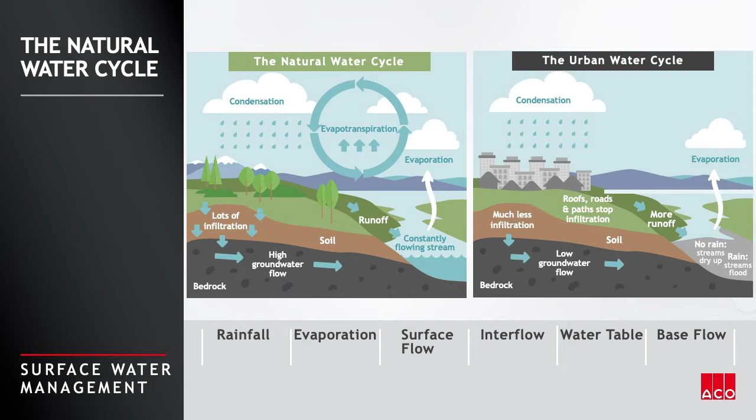So what generally happens is we become more urban and we create our urban environments. We start concreting over everything. We make them impermeable. So in making things impermeable, there's less infiltration into the ground, and therefore less flow going to our river basins, and over a period of time they become dried out, which is what happens in villages across the country. And quite often, because of that high level of impermeability, as the water hits the ground, there's an acceleration of that water as it cascades off the surface.

So if it's not being able to infiltrate into the ground or evaporate straight off the surface or evapotranspirate through plants when they soak them through their root systems, then it's literally going to just cascade straight off the surface, and eventually that creates a problem downstream.

So if it's impermeable, fast-flowing water, no restriction to it as it comes from a site, then whoever's downstream of that area, and we've seen this up in Yorkshire at the moment in terms of the flooding that's happening up there, the low-lying land is the area that gets hit the worst, because all of the flow of water just cascades straight towards that point, and then you get an elevated level of water, i.e. there's flooding in that area.

We'll discuss that in a lot more detail as I go throughout the presentation, but this is just a basic scope of it as you go from the natural system all the way through to a heavily urbanized industrial environment, and you can see that the runoff increases, you get a decrease in infiltration, and quite often or not, you get a decrease in the evapotranspiration through plants, which is what you see there.

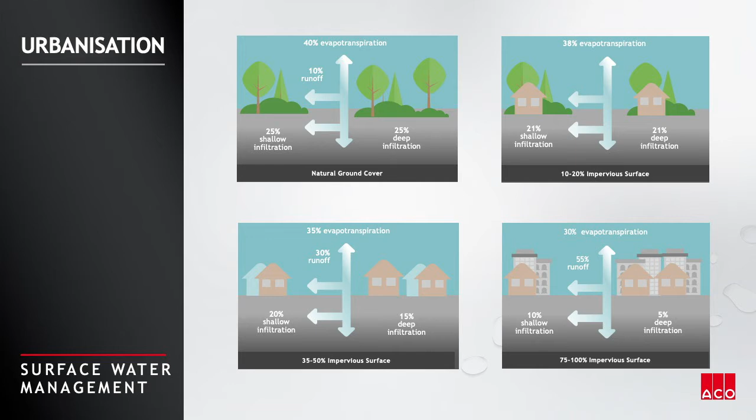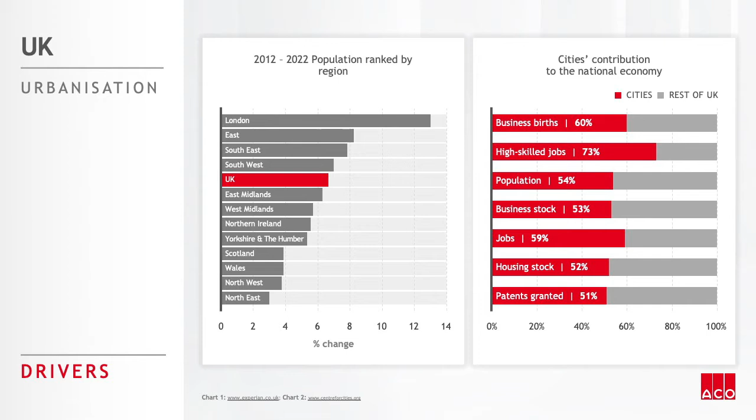So one of these problems of urbanization is population growth. So what you see here is a graphic where you're going to see over a 5% increase in population up until 2022 for 8 of the 13 regions of the UK, and none of them are seeing negative. So what that's going to mean is that more people are flooding to urban areas, and therefore it's going to cause more housing, more impermeable surfaces, more often than not anyway, and they're just trying to find that balance.

The other one is about economics and showing why people are moving to urban areas, and that's just because simply there's more highly skilled jobs and higher pay in those areas. And this is when we're talking about urbanization and we're talking about land use. This is the Coordination of Information on the Environment, or CORINE for short.

And this is where they've used data from photography and taken planes over a landscape over the whole of the UK, and they've taken imagery and analysed the actual land use in its current state. And they originally took it in 2006 and they did it again in 2012. And what they found is that 2,250 square kilometres had changed in that 6-year period. Now, that doesn't mean it's all made into an impermeable surface. That could be from forestry to commercial, from commercial to housing, it's those small changes that happen.

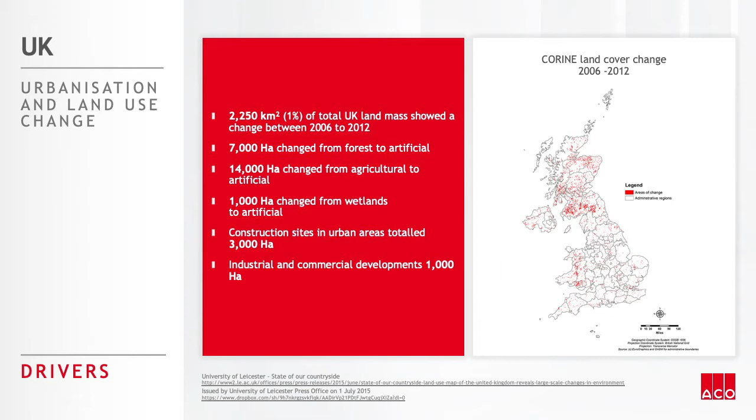But if we said that in a 6-year period, 1% change, and if it is 2,250 square kilometres, if 10 millimetres of rainfall landed on that area and it was impermeable, that'd be enough drinking water for 2.5 days for 60 million people. So when we talk about our sewer systems and how it all connects together, and the fact that most of our stuff goes into a combined sewer network or a foul sewer network, and all that has to go to a water treatment plant, and if the water treatment plant can't cope with it, then eventually it enters our natural system.

So the idea is that we use more of it on site, and that will be a characteristic of this presentation. And those red dots illustrate an area of more than 1 square kilometre that's changed in any given period over that 6 years.

So going on to the road network, well, I don't know how many people enjoyed traffic on the way here today. I didn't, I took the train. But the fact is that we are seeing an increase in road users. There's over 33.6 million licenses held in the UK. So that's the number of people that can drive, and we've got a population of 70 million people, so just less than half or something of that nature of people that can actually drive in the UK, which is crazy.

There's 37.8 million vehicles, so obviously people drive to work and then they drive another vehicle while they're at work, hence that's why there's more. And of that mix, I think it's 80% of those are cars and 11.7% are light goods vehicles, and then it drops down from that, and the rest make up basically motorbikes, heavy goods vehicles and things of that nature. Of that split, 59% is petrol and 40% is diesel, and the other 1% is gas, electric, those kinds of things.

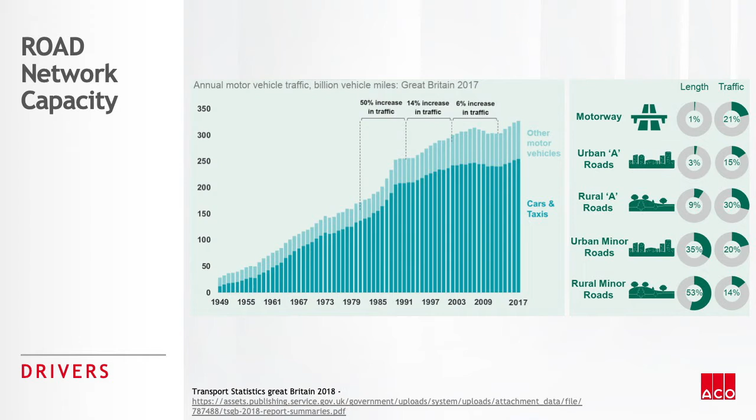So the graphic you see here is the number of miles that have been travelled in the UK, and there were 327 billion miles travelled in the UK in 2017. So that's billion. So it's quite a considerable number of transport miles on our road network. So you can see how it's under capacity, or it is getting to a critical mass of capacity. So that was an increase of 1.3% on the year of 2016.

So of this, I'm focused on van journeys and car journeys. Van journeys increased by 3% and car journeys increased only by 1%. Public transport decreased by 3% in that time. And I know this is all about the life of the raindrop, but as we're adding more and more cars to our network, then obviously that's going to add more pollution unless we focus on having electric vehicles or hydrogen-powered vehicles, or if we're having more public transport. So that's the reason why I'm focusing on that.

And particularly when we talk about congestion as well, as more cars are added we see our journey time is elongated, so there was an increase of 9 seconds for major roads, and that's only a 1.1% increase, but still. And then the journey time increased by 46.9 seconds for our urban roads. So that's for an A class, and that is adding on.

So say if you had a road which was completely free of traffic and then compared it to a journey time when you actually had traffic, then that's the amount of journey seconds that have been added. So if the motorway is completely clear, then it would be 9 seconds less than the journey you took on the motorway as you made your way up here. Does that make sense? Hopefully. And then on the urban roads, it was 46.9 seconds.

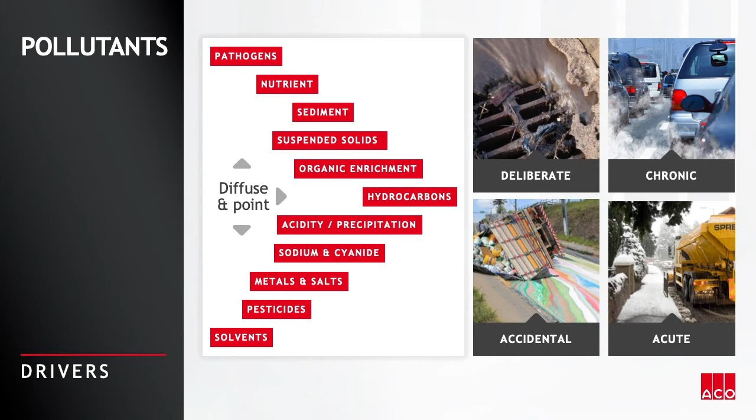So the road network produces more. We've seen a 65% increase in the amount of pollution that's produced by light goods vehicles, and that's because diesel was massively promoted under the Labour government, and until recently they found that obviously that's massively poisonous with the nitrous oxide that is produced out of the exhaust pipes. But we have seen a decrease in the car outputs in terms of the level of pollution that's produced there.

So this is just a side note, and this is the health implications of pollution in the UK. So the pollution directly contributed to a cost of 1.69 billion to the NHS and social care system between 2017 and 2025, so that's predicted. And it cost our economy 2.7 billion in terms of the overall cost of dealing with problems, of people taking days off and things of that nature.

So it is a massive contributing factor to our everyday lives and also our economy in terms of the level of pollution. And recently there have been articles coming out in The Guardian of how this is going to affect our young people's health in the future as well, as we have more climate change and things of that nature.

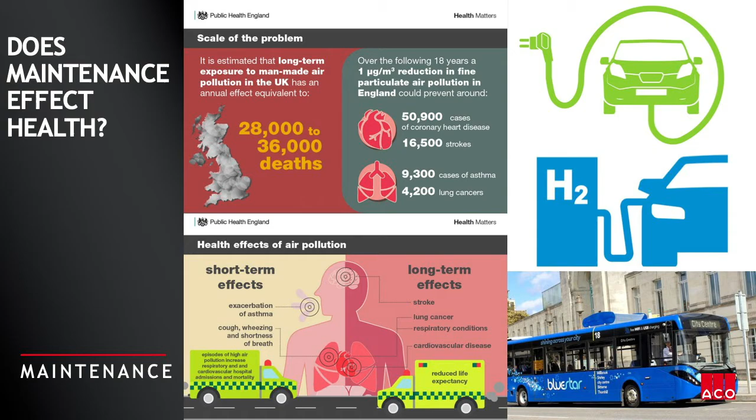The image in the bottom corner here is actually a pilot scheme. It's happening in Southampton. I don't know if many of you have seen it, but they've started adapting the vehicles so they've got a filter on the roof to reduce and remove the levels of air pollution in the environment. So that extracts it, which is ironic considering it's a diesel vehicle.

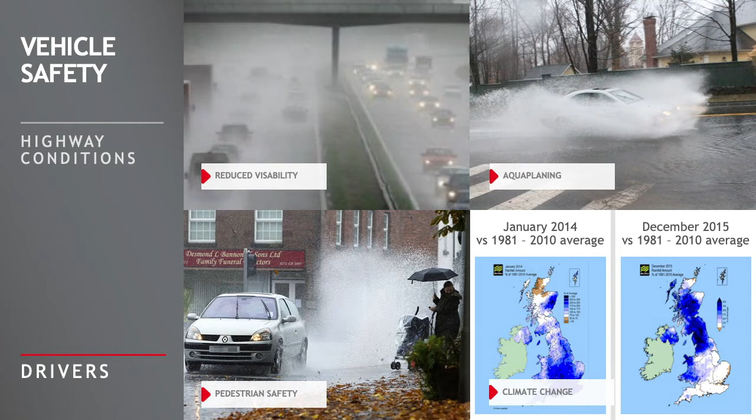So here's a bit about the danger. So as it falls, it lands on our road network, it creates a danger. So what you see here on the motorway is reduced visibility, so that's people you can see and people that see you, so therefore it creates a bit of a danger. It also affects your stopping distance and thinking time.

Aquaplaning and flooding create a problem for vehicle performance and also vehicle control, so that creates a danger. You've got pedestrian safety. It is actually illegal to splash somebody if you did it on purpose. I don't know how they would actually prosecute you, because you could say it's an accident, you didn't see it, but obviously it is a danger.

So making sure you design appropriate drainage and also maintenance schemes into your products will make sure that people aren't splashed on the highway. It also presents another danger when you do have flooding for pedestrians, because they might make their way into the highway to avoid that flooded area, and therefore they put themselves in danger. So all these have a problem.

Black ice also comes into that, and snow comes into that in terms of the dangers they cause, especially black ice when you can't see it, and of course you could skid and come out of control in your vehicle. And finally, the bottom image down there is climate change. So all of these different things are exacerbated by climate change as storms get more aggressive over time.

So it is going to be a massive problem, and it is going to have an effect on our environment, including the heating effect as well. So that's going to have a massive effect on our road network and our maintenance requirements and what effect it has on the materials that we use in those situations.

So here we're just talking briefly about a proprietary product treatment train. I'm going to talk about SuDS, and some of the SuDS are listed down below. So this is Collect, Clean, Hold, Release, which I'm going to go into a bit more detail in a moment. So what you can see are different avenues of actually controlling the water. So basically we have to collect it as it lands. Then if it isn't polluted, we might be able to just put that straight into a natural system.

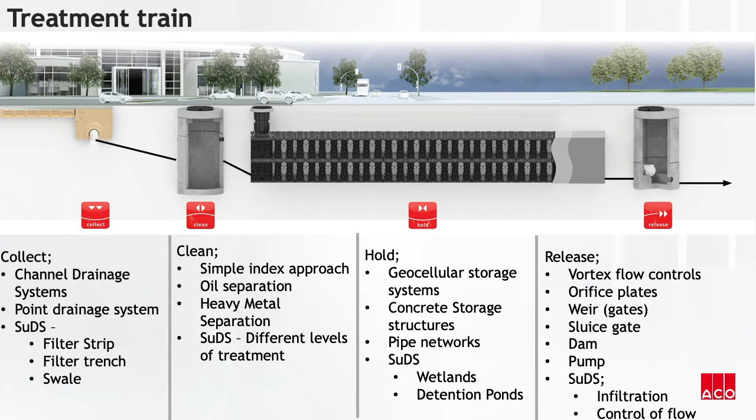So many different methods. We're showing geocellular storage systems on the slide there, but we will go into a bit about SuDS as well. And then finally, we can release it into the natural environment or into the combined sewer. So when I said about connecting to the sewer network, we might want to restrict the flow to make sure they can clean the water and make sure they're not using as much energy, or it doesn't cause issues downstream in terms of flooding. So we're going to go through them one by one and try and stick as much as we can to the highway situation.

So first of all, just talking about collect in terms of how you do it. So in the slide before, you may have seen that there's loads of different methods of doing that. So it could be a filter drain at the side of a road. It could be a gully system. If you live in Birmingham, you will actually recognize this project or scheme.

So this is the central reservation, and what happened there is that one of the gratings was left up. It was about 25 years ago, as it says there. But a grating was left up and it caused a motor vehicle accident.

So from this point, what actually happened is that on any highway scheme in the UK now, you have to use something called a monolithic type system. And that means it's just a one-piece unit, so you don't endanger people's lives. So in this scheme, it got changed over to a monolithic type product, and therefore it made it safe for any road user.

So that's what's actually happening. What I was trying to highlight on the slide is that no matter where it is, you have to actually collect the water. So you can see this is quite an industrialized area. There's no green infrastructure on either side of the road, so it's outletting straight into the middle, and it's actually conveying the water away. So channels are a good way of affording that.

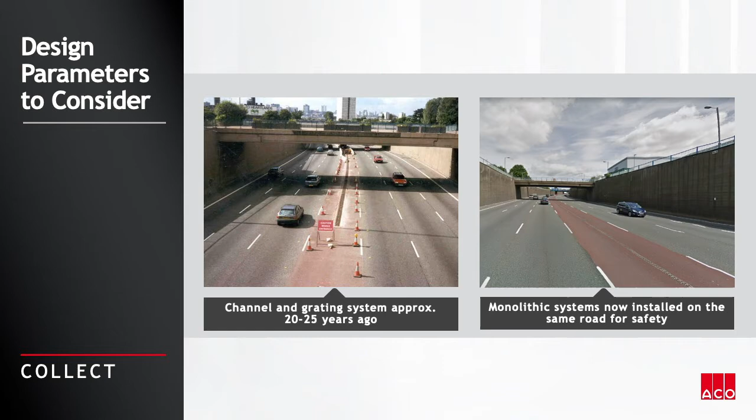Gullies and other items or proprietary products can do the same in terms of catching water. So that is it when you talk about monolithic type things and making sure that you collect it. They all do the same thing. They all catch water. It's just about considering what loading it has to be under and what design criteria you have to follow as well.

So what I was meant to highlight on there is that when you're carrying out a design in terms of how much water is caught on the ground, you have to design it, in the highway situation, to a 1 in 5 year storm. Now, some schemes or highways authorities or indeed local authorities will stipulate you have to use a higher storm. It's entirely down to them.

But in terms of national guidance, which is the Design Manual for Roads and Bridges, they give you a number which is 1 in 5 years, with a caveat that it has to take account of 20% climate change. So just make sure you design that into your schemes. And in a highway, that has to reach a minimum of D400 loading as well, in order for it to sit in the highway.

Unfortunately, I can't go into too much detail. I've got 20 minutes, but there are categories of loading that you have to adhere to for any system you put into a highway situation. So whether it be a gully, it'll have to be D400 loading, or a channel will have to be D400 loading, okay? And that's talking about monolithic systems.

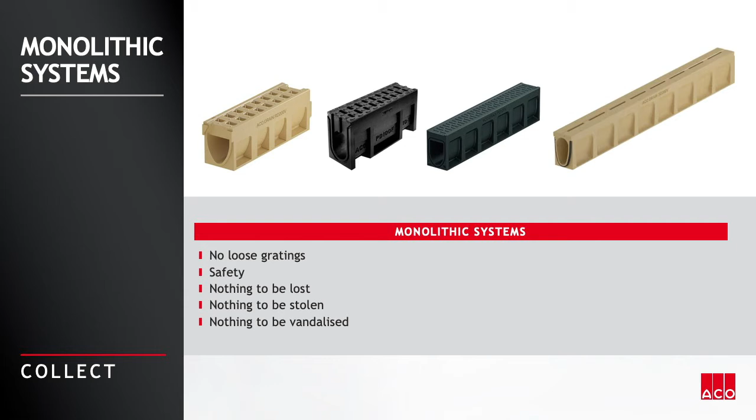The one thing to highlight is the opening at the top. Each one will be different depending on the situation you face, and depends on what you perceive to be the potential level of debris that might be going in there, or how fast you want the water to actually enter the system, so you know these are bigger than the other ones.

And you'll see these in quite a large array of the environment, a combined kerb drainage type system. These are a good conveyance tool, allowing the water to cascade into the channel at the side of the road in order to convey it away. The reason I'm highlighting this is that in order to stop aquaplaning, ponding, localized flooding, you want to create a long conveyance path, and that long conveyance path allows the water to discharge a lot quicker.

So what you see here is the connectivity up to different SUDS environments. The reason why that's highlighted is that what epitomizes SUDS is making sure you keep things as high up on the site as possible and use it at the source. Now, one way of saving space and keeping things high up on the surface is if you have a high outlet into a green piece of infrastructure.

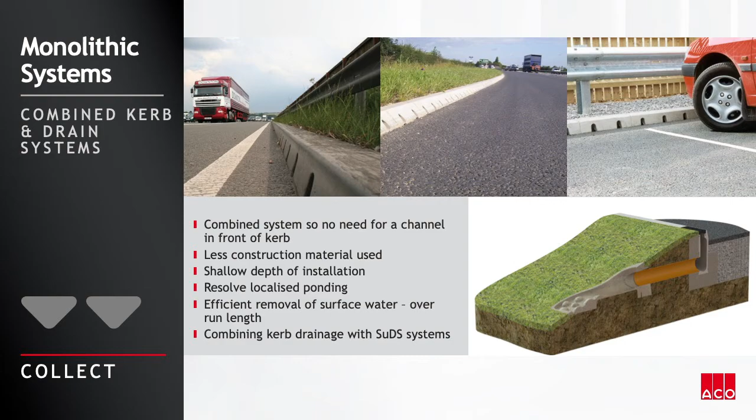Car parking spaces, I mean, we're talking about a highway here, but car parking spaces are worth £2,500 a week to a supermarket. So in terms of context, if you can shrink in the sides of any green infrastructure, which needs a 1 in 6 crossfall for safety so you can crawl out of it, it's beneficial to try and keep things high up on the site.

So imagine if we replace that and we have a pipe that has to be buried 1.2 meters to the crown, therefore your swale goes from being 600 millimeters down to 1.6 meters, which is quite a considerable distance. But what we're talking about here is the guidance for oil separators and the SUDS guidance in terms of whatever we want to design as SUDS.

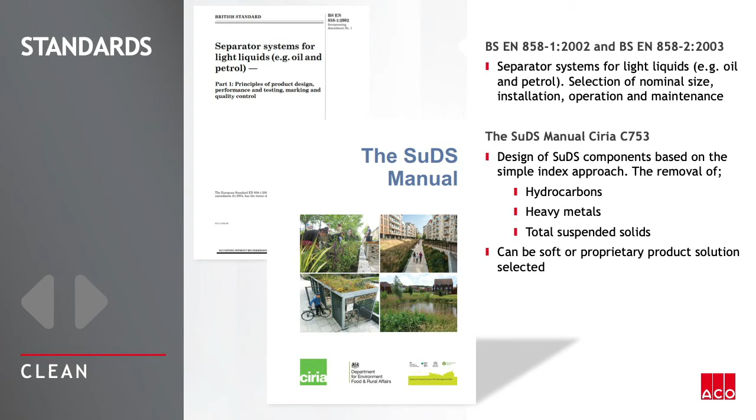So first of all, proprietary products in terms of oil separators are devices that remove oil, and I'll explain those in a minute, but that's the guidance you follow. And then the SUDS manual has something called the mitigation indices. Is there anybody in this room that has designed to the mitigation indices or come across them? Thank you, that's one individual. Has anybody else seen it, or you have?

So within this are tables in the SUDS manual. So what they do is have a table for the location you're working on. So in this case, we'll say a road. So say if we said it was a trunk road, we might say it's got heavy loading. And what it means by heavy loading is it's got heavy loadings of these 3 things, which are hydrocarbons, heavy metals, and total suspended solids.

And what we have to do by using tables and design is we have to use a piece of green infrastructure or a proprietary product to mitigate against these levels of pollution. So that's what essentially we do in practice, and I'll explain a bit more about flow rates and stuff coming out of a system. So these are proprietary products in terms of oil separators. What you see at the top here, that's an oil separator; that's a heavy metal separator. I'll explain them one by one.

An oil separator is a device that removes the oils. It does this by gravity, so you get total suspended solids separate and go down to the bottom, and then you have oils which just float to the top. Oil floats on water, and then it's got a little gate on it that closes. Now, essentially that's removing 2 of the pollutants from our 3 that we mentioned a moment ago.

And there's 2 different kinds. So you've got full retention. These come in a range of different sizes. They can go absolutely massive, and they have a range of different layouts. But in this case, we've got a full retention and bypass. Full retention treats every single bit of pollution coming off the site, or every single bit of water. And then you've got the bypass, and it only treats the first 10% of the water.

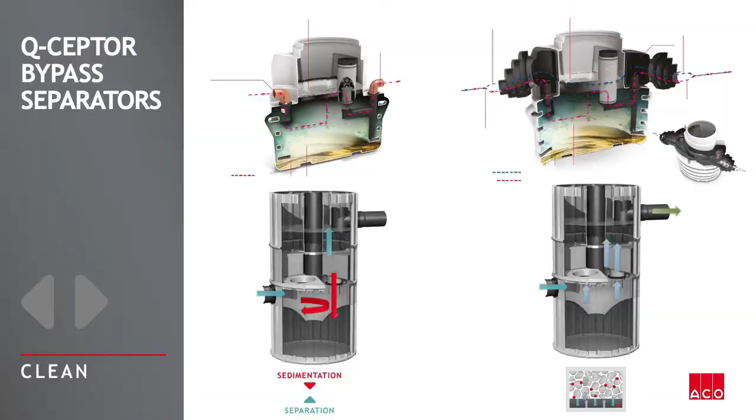The idea behind that is the first 10% of rainfall will have the highest concentration of pollutants, and therefore if you can clean that, then you are kind of doing most of the work, and then the rest of it will go to a combined system. You never really use these in combination with SUDS unless they're actually doing a large volume of the work.

And you've got different classes. So you've got class 1 and a class 2. Class 1, you'll hit 5 milligrams of oil per liter, or in a class 2 it's 100 milligrams of oil per liter. So it's about what they allow to be carried forward.

In the bottom, I better speed up, is a heavy metal separator. Now what this does is it removes all 3 of them to a high degree. It's a very specialized item, but it uses gravity to remove the total suspended solids, and then it's got a filter inside it which removes the heavy metals and hits a high degree of them in terms of 0.8, 0.8, and 0.8, for those in the room who do understand.

But the idea is to try and strike a balance between maybe proprietary products doing a lot of the work for you, and then actually having green infrastructure that can do essentially the amenity and biodiversity work for you at the end of a scheme. And here are just some of the SUDS features that are available to put by the side of the highway, or not in case of the green roof. But for the rest of them, they can be put by the side of the highway in an environment.

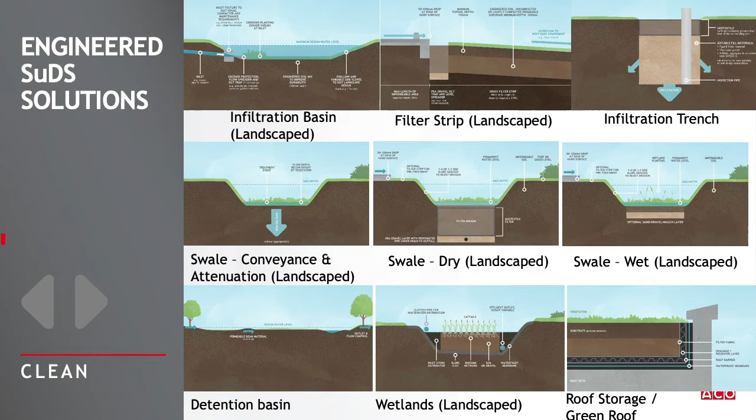So each one of these hits different mitigation indices, and it's all described to you in a table, and you can use them in sync with each other, so you can actually have a chain that's created going from one to the other. They carry out their treatment with flow, and you actually have to monitor the flow going throughout the actual device and the amount of time it takes to get from one end to another.

So I'm only going to focus on a swale in this particular presentation, but what they recommend is that the flow should be 0.3 metres a second in the swale. It should be no more than 100 millimetres in height, so that means you have to change the width of the swale and the length of the swale to suit the design that you're working with, and it must take at least 9 minutes for water to travel from one end of the swale to the other end. So that's essentially what happens.

And if it's got multiple inlets, it's got to take 18 minutes to go from one end to the other end. So basically it's taking account of how the length of time going along the swale itself is actually purifying the water. So you might be limited on the space you have on a site, therefore you might want to shrink the swale down. So kind of finding that balance between an underground system and above ground system.

And they are designed to a 1 in 1 year event. So you're only really dealing with the pollution for a 1 in 1 year, so it's really dealing with that flow in the base. But you might have to go up to the storing of water within a piece of green infrastructure up to the 1 in 100 year period. Well, it depends: if you're working on a highway, it might only be the 1 in 5 plus 20%, but if you're dealing with other environments, it could go up to a 1 in 100 year storm.

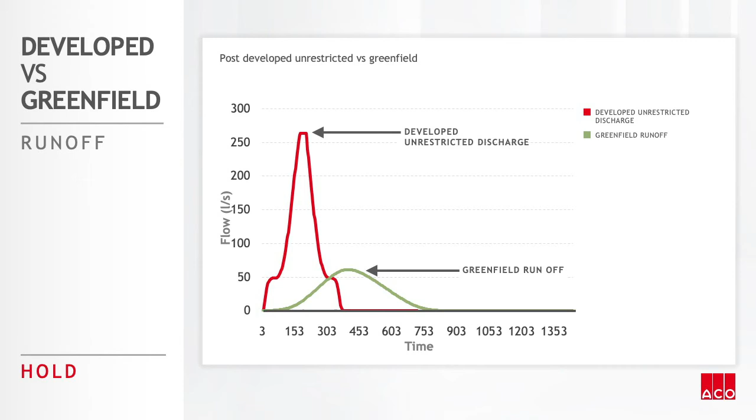And then if we were to come along and concrete over the whole of the area, you're going to see more of a flow like this, a massive peak or influx of water on the site because it's all going to flow off rather quickly. And of course, if you compare what the water treatment facility or the natural system might have to do, it might only have to treat this much water for this period of time, but now it's had to treat it a lot quicker and a lot higher volume.

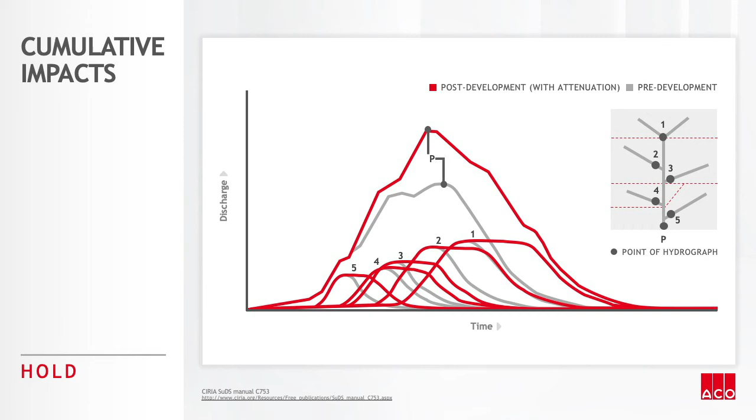And of course, if we've got a multitude of different sites, so these are 5 different sites on a network, as you can see the network here coming up, all of them are eventually going to discharge at a downstream point, which is P. Now, if P is a low-lying area, let's say it's a small village, you've got loads of villages connecting up above, then potentially that village could flood. If it's the water treatment plant, then it might not be able to treat the level of water that's coming into it, so it has to use a combined sewer overflow, and that means it discharges straight into our river network or our stream.

I mean, it can be controlled spills, it can discharge that water or hold it on fields and things like that, which you often see in rural environments, but sometimes they can't do that and they just have to discharge into the local river, which causes a high level of pollution in some cases. So then it can have a negative effect if it causes flooding downstream and they sacrifice a village, let's say, that's less popular, then that could potentially happen as well. So a controlled flooded event. But obviously this has a negative effect on our urban environment, but also our natural environment as well with levels of pollution going into it.

So water companies are under increasing pressures, as we mentioned before, in terms of the capacity of their network. And this more often than not is because of population growth and a lack of investment in the actual sewer system itself. It can also happen with urbanization in terms of the buildings and infrastructure that we're building, but a massive problem is urban creep as well. Now this is where people will create another driveway at the front of their house, or they add a conservatory to the back, and they might not necessarily have a nice little tank or something, and all that adds up to a much larger volume of water that's entering the system.

So for this reason, they've come up with the capacity assessment framework, which is a paper and also a calculation that has come out from HR Wallingford, who is working with the water companies to work out what capacity is on the network, and effectively they work with councils to give you as a designer the rate of discharge that can go into their sewer network.

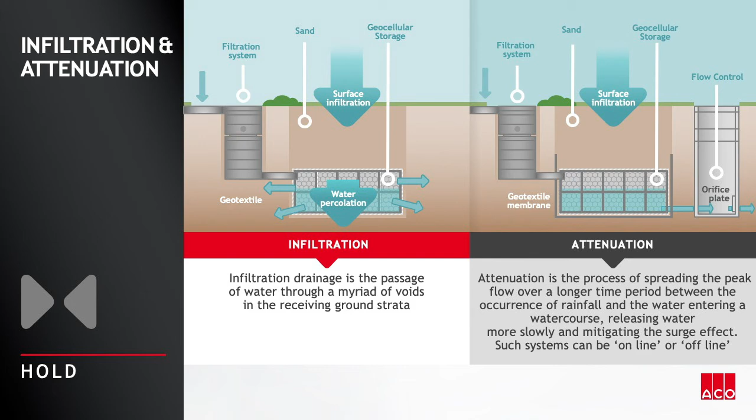Obviously that can be done with a variety of different things such as SUDS as well. There's an array of proprietary products on the screen you see there, so different geocellular storage systems, different plated structures at the top right-hand side. You can also have buried pipe systems, concrete box culverts, and SUDS systems as well.

So remember, all of these can be interchangeable in terms of what your site has the area for and what you can use. But more often than not, because concrete structures are seen as so expensive and plated structures are seen as awkward, geocellular storage systems, which are basically plastic crates, are stored underground. That's the ACO one in the top left-hand corner.

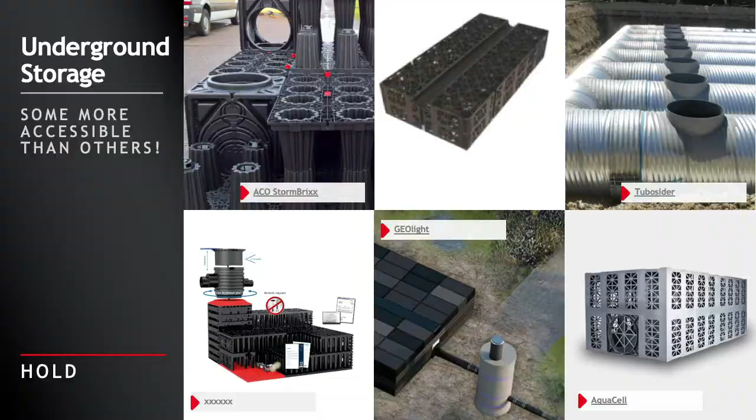And finally, just to go on to release, and then we'll go on to a few more of the subjects. So what you see here is two release mechanisms. You've got a Vortex Flow controller against an orifice plate, and there are loads of different methodologies. I'm only going to show you two here, unfortunately, but there are loads of different methods of actually releasing water from the site, including weirs, baffle gates, and stuff like that.

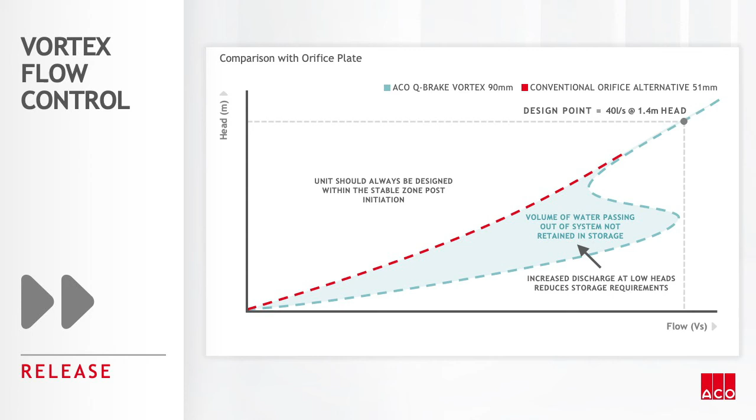So what you see here is the red line is an orifice plate, which is the direct relationship between the head of pressure and the orifice diameter, and then you've got a Vortex Flow controller, which works by trapping a pocket of air in the top. The idea is that this shows the Vortex Flow controller releases more of the water from the site. Now, this doesn't really characterize what we're actually aiming for, but in terms of the ideology behind removing as much water as quickly as you possibly can, it reduces the amount of storage that you actually need on the site itself.

So it will be dictated by the environment you're connecting to, though. With a combined sewer, obviously we said about the restriction there, but if you are connected into green infrastructure, the flow rate coming out of the system will directly relate to potential scour in the system. So back to the swale again, they don't like it being over 1 meter a second going into the swale because it could potentially cause scour. It says 2 meters a second if it's on a slope, but it's 1 if it's not. So it is worth making sure that you're not releasing too much at any given time.

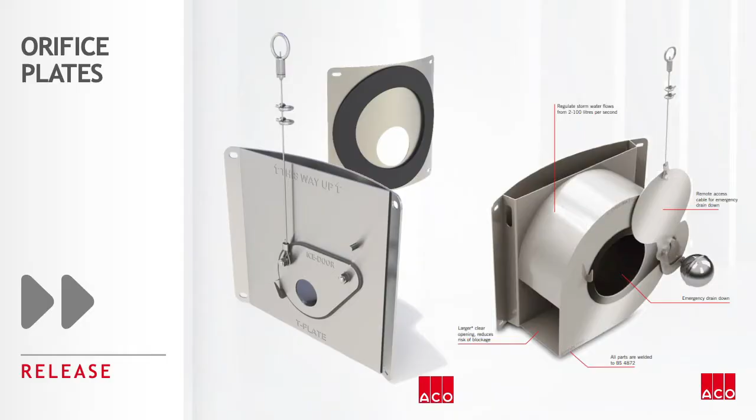So these are just the two things I was talking about. You've got the orifice plate there, it's just a head relationship with the orifice, and then that's where the pocket of air sits in the top and it gets knocked out. So when the head reaches a prescribed level, it will knock that pocket of air out and it creates a vortex like you see in the plug hole as you turn your finger around, and then it controls that flow of water going out. So in a lot of schemes you'll see these being used.

And finally, in the release section, before we move on to SUDS, are the ways of controlling or slowing down the velocity of water and preventing that scour occurring. These are things called swale inlets, and the idea is that you are slowing the velocity of the water down to such an extent it doesn't create scour in the actual system. You can see that it's slowed it down quite a bit because you've got all the debris that's on the outlet of it there.

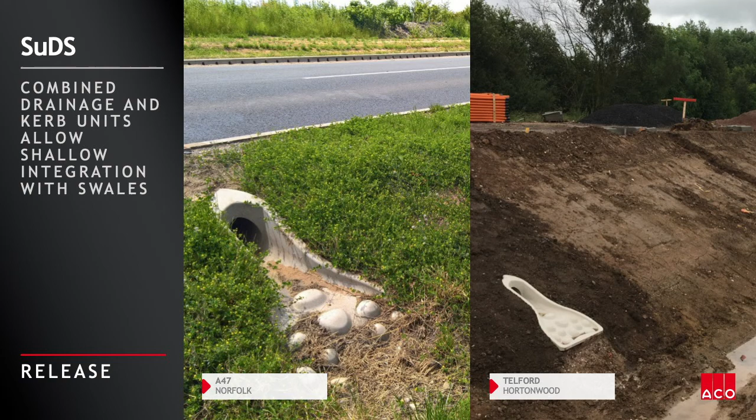So just to talk about SUDS. SUDS are really important for climate change, or mitigating climate change in the future. It's really important for our health as well, in terms of our health and well-being. More green spaces mean healthier people, healthier clean air, healthier environments.

So what it really depends on to create that kind of environment is the 4 pillars of SUDS. You've got water quality, which we discussed, water quantity, we also discussed that. Then you've got amenity and biodiversity, and how you can actually integrate a system to support those different things. So what I'm going to do now is go through a few little case studies and different things.

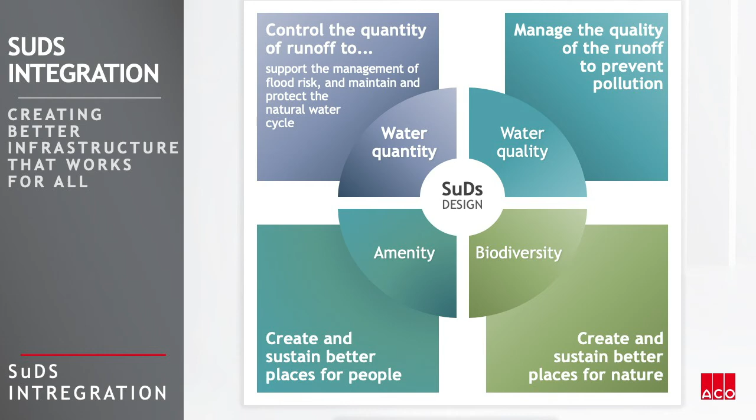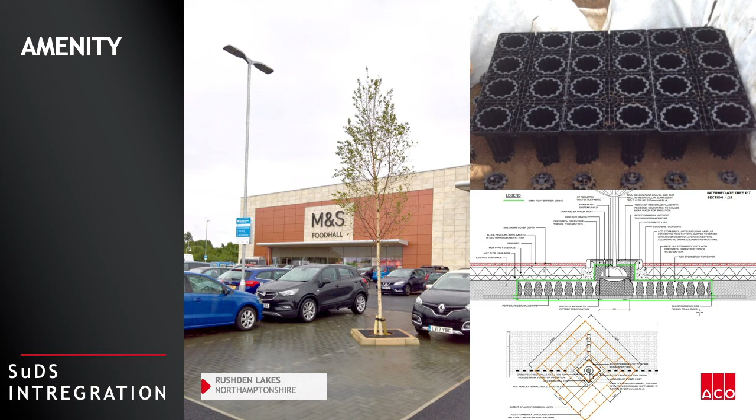Tree pits. Trees are really good in terms of they create shade, prevent against climate change, create oxygen for us. They do suffer from requiring 80% compaction, whereas with our highways and the way we do construction, we want 100% compaction. So what you can use is geocellular storage structures around the base of the actual tree pit itself, and the formation of them will promote the tree bulb and the root system to grow into the actual geocellular storage tank. That enables it to be prosperous and grow.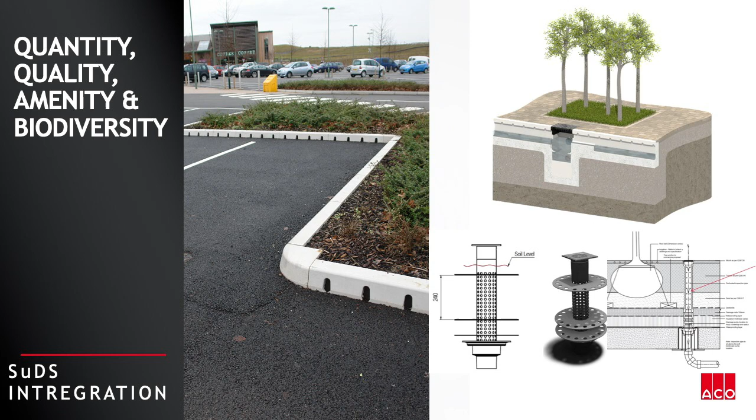So what you can have is a permeable pipe coming out the back of your gully, channel system, or in this case a raised curb, and the permeable pipe will actually go into the soil and will water it in a sense. What you see here is the same with a gully, and this is actually a planter gully itself that sits in the soil, and you can set the holes at a higher level. So you can have a storage in the bottom, then that cascades out.

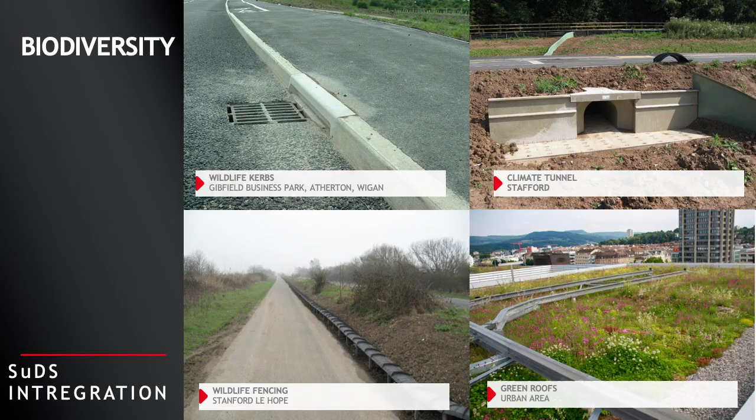And then green roofs are a methodology of being able to actually promote corridors for insects and things to come into inner city areas, but it's also true of verges and green infrastructure on the side of the road, which can promote biodiversity and connect up different pockets. So therefore it enables nature to move along the corridor to get to another much larger area.